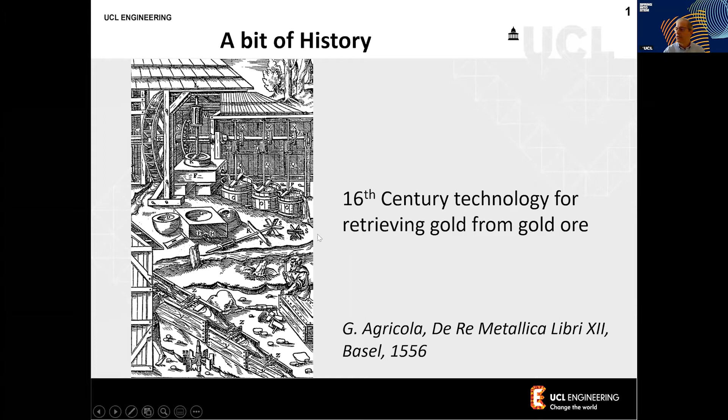And in fact, these reactors are still being sold and being used, and they're working very nicely. But we would like to see if there is a new technology, considering now that we're in the third millennium, we would like to see if there is a new technology that we can use. And this technology, the one that we'll talk about today, will be process intensification.

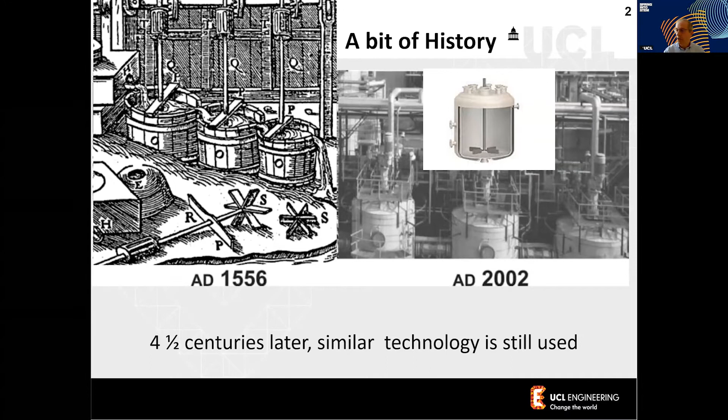So what is process intensification? Process intensification is a strategy for making very large reductions in the size of a chemical plant. So we can make things much smaller, but also we can make them much more efficient. These reductions come from shrinking the size of the individual pieces of equipment, but also by cutting down the number of operations in the chemical process, as we'll see later in some examples.

This concept of process intensification started with Professor Colin Ramshaw, who was initially at ICI. ICI does not exist right now. It was a chemical company based in the north of England initially, but it was an international company as big as BASF would be today. And he actually suggested this concept.

That was back in the 1980s. After that, people in China developed the high-G technology that he actually started talking about in the 90s and maybe a bit later. The Delft University of Technology, together with DSM, worked on structured reactors, developed further the technology, and moved into PI. And after that, it was France who got into the technology. And in fact, maybe about 5 years ago, finally the US started getting into this technology, and they have a big program which is called RAPID.

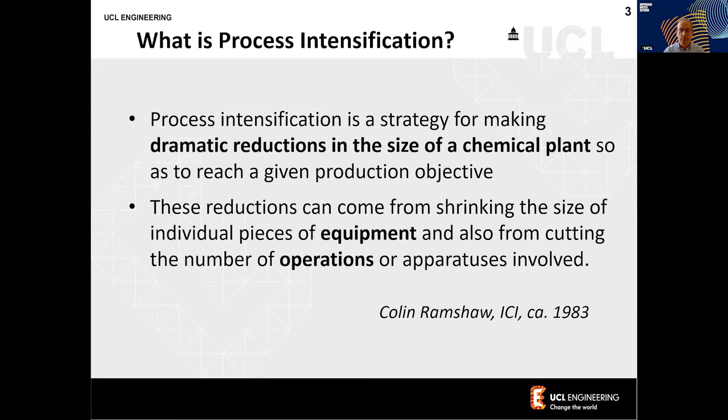Some other characteristics of process intensification: when we are talking about process intensification, we're talking about a revolution rather than an evolution. And this is because the change is substantial. We're not talking about decreasing the size by a factor of 10% or 20%. We're talking about decreasing the size by a factor of 1,000%, 10,000%.

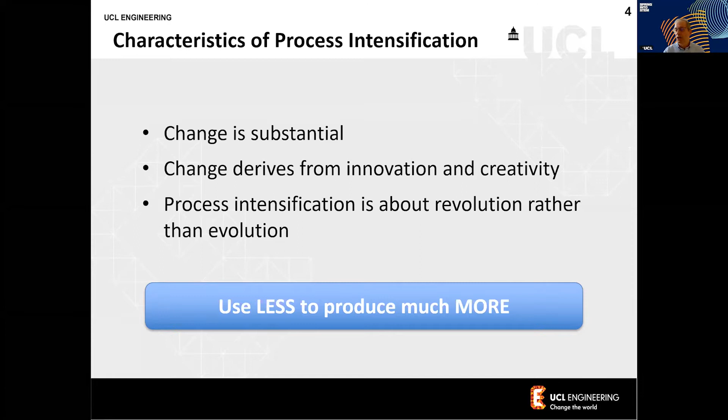Another way to think about process intensification, something that Andrei Stankiewicz, another person who was very much involved in process intensification from Delft, as I mentioned earlier, used to say, is that process intensification is basically using less to produce much, much more. I would say also these days it is important not just to make more, but also to make it more sustainably and more environmentally friendly.

So many of the present chemical plants look like that. This is kind of a virtual excursion of school children in a chemical plant, and the engineer here, you can see, is very proud and showing the school children this chemical plant, and he says this is the biggest unit of its kind, and this is where we are.

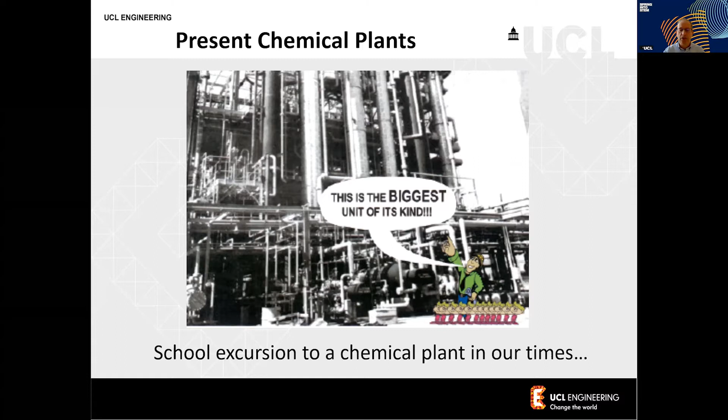You can see the big refineries, and this is how they would look like, and they still look like that currently. What we want to do is, in the 21st century, go and change this paradigm and talk about not the biggest, but the most efficient, the most sustainable unit of its kind. So you can see now the pictures of the old chemical plant on the walls, and hopefully our chemical plants in the 21st century and beyond will be much more efficient, smaller, and unobtrusive.

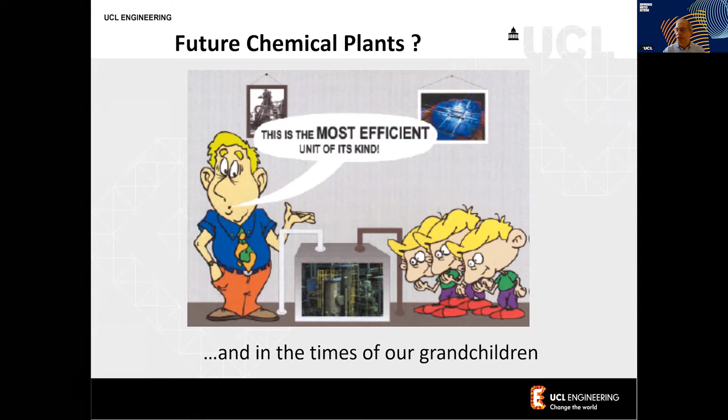So this is the new paradigm of process intensification. What are the benefits of process intensification? Here PI is for process intensification. The capital and operating costs...

The capital and the operating costs, hopefully, when we use process intensification, can reduce by a factor of 20 to 80%. So you can make processes cheaper. We use smaller chemical plants. Very importantly, we can increase the safety.

And the safety increases because we decrease the volume. So if you decrease the volume of a reactor of a chemical plant by 10 to 1,000 times, then you have less chemical available. And even if there is an accident, the impact will not be as high as would be with a standard chemical plant.

Energy savings, which are very important, can be 20 to 80%. Less waste, which means that we have better selectivity to the desired product. Selectivity is a measure of what percentage of the raw material is converted to the desired product as compared to the undesired. So we like to operate at 100% selectivity, meaning 100% of the raw material gives 100% of what we desire, and zero waste.

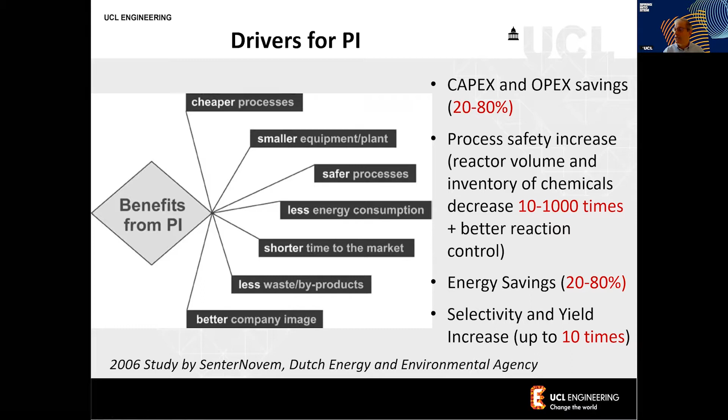And there are other aspects which are interesting to managers, which are shorter time to market because they are smaller chemical plants and so forth. These are from a study from the Dutch Energy and Environmental Agency. So these numbers are actually numbers that people have come up with based on examples of process intensified plants by that time.

What are the barriers to PI? Today, most of the plants are still not intensified, although there are more and more chemical plants, particularly the new ones, which are designed with process intensification in mind. One is the investment risk, because these are novel apparatuses and processes, and in some cases it's not proven, and that's why if people are risk averse in the industry, they would tend to actually use the old equipment. We need more research and development, and this is also what we are doing at UCL and in other chemical engineering departments, to better understand and develop these processes so that they can be taken up by industry.

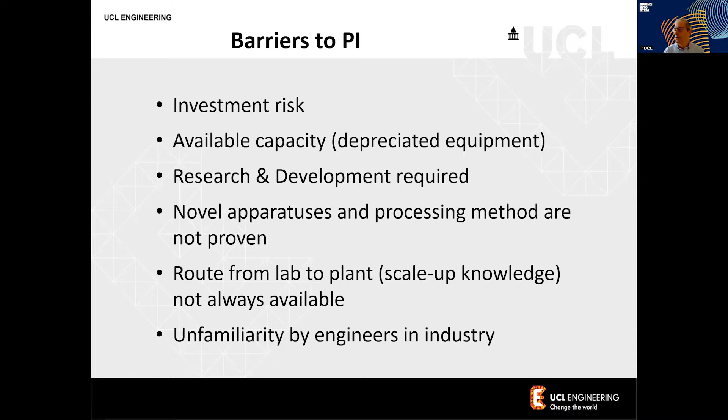The route from lab to the plant is not always available. We develop them, we study them in the universities, but before industry adopts them, we need to demonstrate them at pilot plants at a slightly larger scale, not yet at the final scale, but we need to demonstrate them to build confidence in the industry. And this is the major issue, basically the unfamiliarity by engineers in industry that we will need to make sure we overcome. And here is an example.

This is not from the chemical industry, but this is the same type of mentality you see in this cartoon, where the soldiers have a fight, a battle to fight, and as you can see, they are so engrossed in their own type of urgency to fight the battle that they are not interested in using the new technology that can potentially help them.

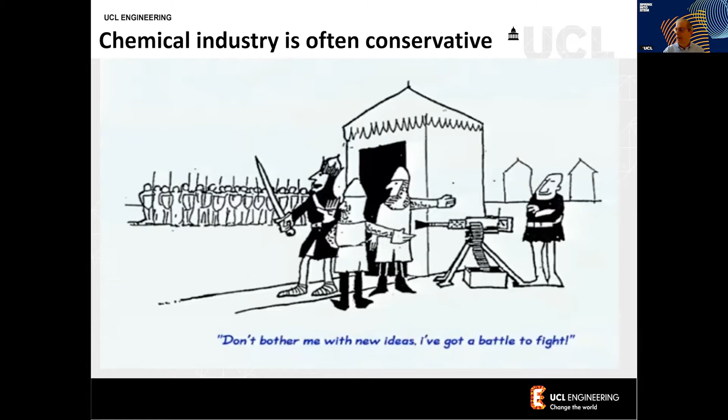And process intensification is not something actually that new. If one looks back on the first industrial revolution, and if you have an old 20-pound note, you can actually find hints of process intensification on it. This 20-pound note has Adam Smith, who was an economist, who wrote this book in 1776, The Wealth of Nations. And over here, it says the division of labor in pin manufacturing and the great increase in the quantity of work that results.

So Adam Smith, in the book, says that he visited a pin factory which employed 10 men, and these 10 men produced 48,000 pins a day. And he goes on to say that if in this factory, the labor was divided, so each worker did a different task—one of them would be the packaging of the pins—however, if there were 10 workers that did all of the steps themselves, from the initial use of the raw material, creating the pins, all the way to packaging, then he reckoned they could produce only 20 pins a day. So you can see process intensification in action here, going from 20 pins to 48,000 pins.

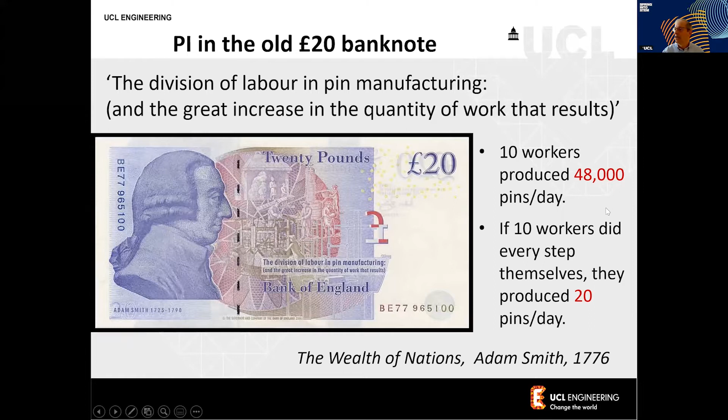So this is in fact how the Industrial Revolution started, and you can see that the concept, in that case, was by division of labor. And of course, pins maybe now are not very much used, but the concept of having a different philosophy of the way that we organize chemical plants could provide an intensified increase in productivity by many orders of magnitude.

Currently, the way we can achieve process intensification is by developing different equipment and different methods. We'll see various examples of reactors, like the spinning disk reactor, the static mixer reactor, monolithic reactor, and microreactors. But also with methods using alternative sources like centrifugal fields, ultrasound, solar energy, electric fields, and microwaves. As you know, the chemical industry is moving away from using oil as an energy vector and trying to use electricity instead. So this is another example of process intensification.

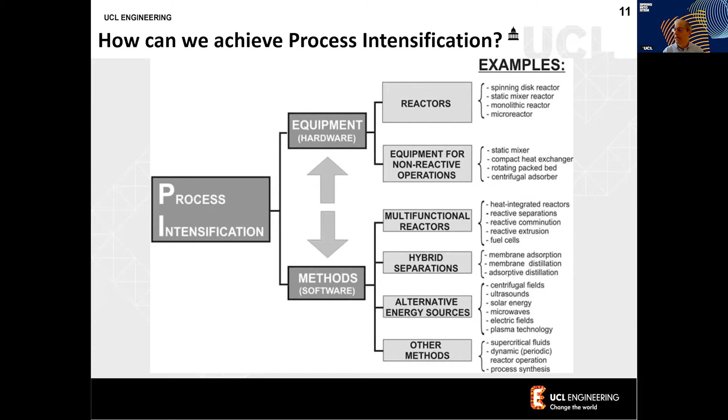So these are two equations which are very similar. They're very simple, but they give you a very good grasp of why we can intensify processes when we go to the small scale. If some of you may have come across this, essentially it's like Fick's law over here.

Here, the Fick's law: rate of mass transfer is the surface to volume ratio, the surface of a vessel, external surface, over the volume of that vessel, multiplied by a certain proportionality constant, which in this case is the diffusivity, multiplied by the driving force, which is a gradient of concentration - the difference in concentration over the difference of distance from a point inside the vessel to the point where we need to have the mass transfer.

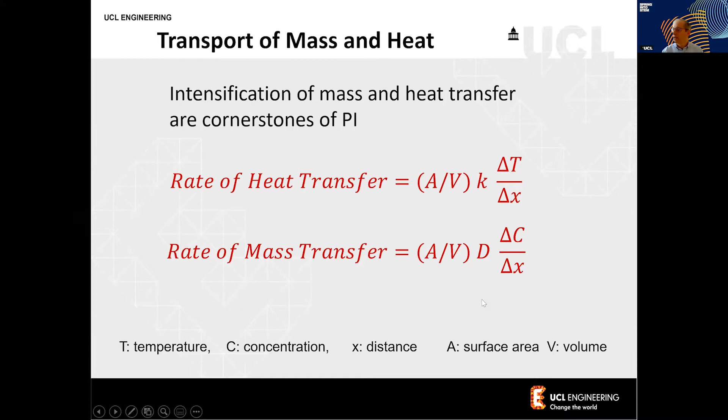And this is the same equation here. In that case, it's called the Fourier law, the heat transfer. These are the fundamental equations of chemical engineering, and it is very, very similar. You can see here, surface to volume ratio, the constant now is the thermal conductivity, and the driving force now is not a concentration gradient, but a temperature gradient. So again, x is the distance, a is surface area, and v is volume.

This is something that nature has been doing for a long time: when nature wants to increase surface to volume ratio, what nature does is decrease the size. You can see that clearly from geometry. If you take a cylinder, the external surface is pi d L, over the volume of the cylinder, pi d squared L over 4, which gives 4 over d.

So as we decrease the diameter of a cylinder from 1 meter to 0.001 meter, or 1 millimeter, the surface to volume ratio increases because the diameter is in the denominator. So the surface to volume ratio goes from 4 to 4,000 - an increase by a factor of 1,000, or 100,000%. So blood capillary vessels with a diameter of about 10 microns will have a surface to volume ratio of 400,000 square meters per cubic meter, which is a huge surface area.

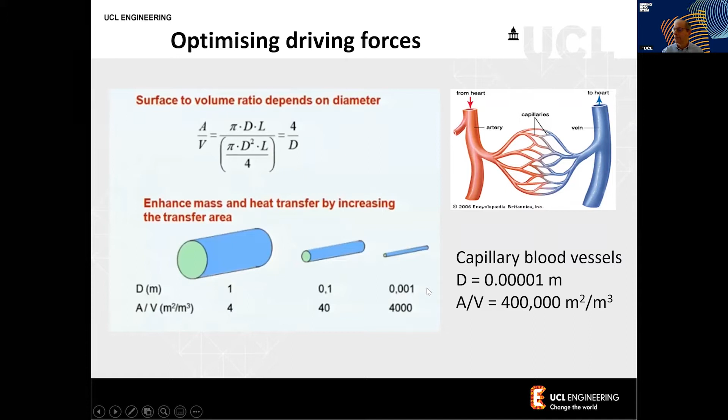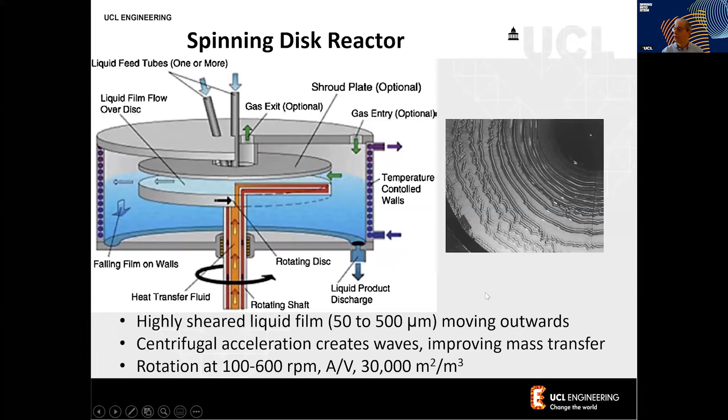An example of a reactor that has been used to intensify processes is the spinning disk reactor, where liquid is fed onto a disk which spins. Here the concept we use is centrifugal force: because we spin the disk so fast, centrifugal forces throw the liquid towards the side. At the center of the disk, the liquid is thrown to the side, becomes very thin, and also creates ripples. These ripples improve the mass transfer, but also the surface to volume ratio is very high. I'll try to play a video here to see how this thing works.

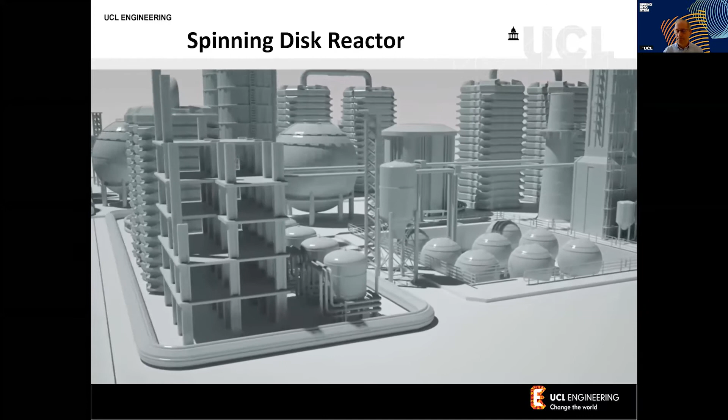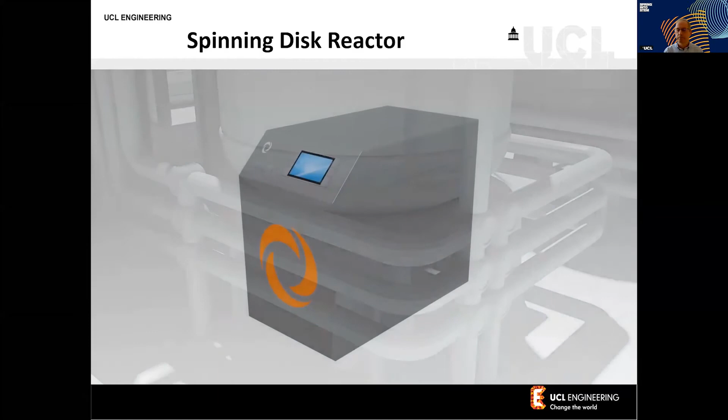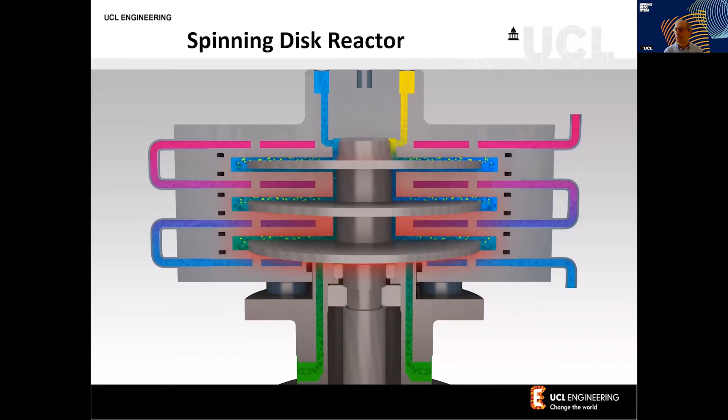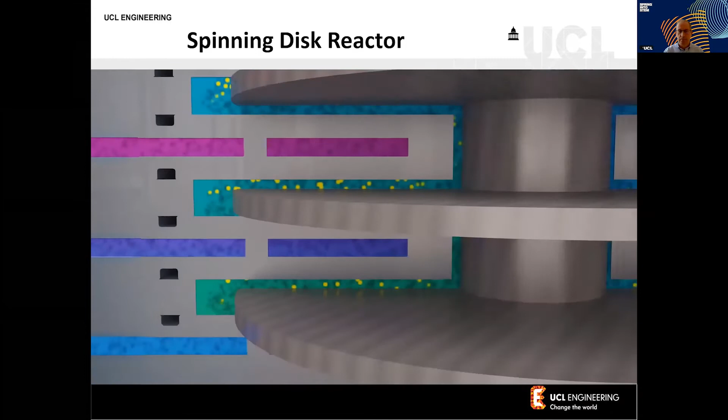The chemical reactor is at the heart of a chemical plant. Reactions are typically performed in large vessels. The spinning disk reactor outperforms conventional reactor equipment, adding unique process controllability. This reactor consists of a stationary casing connected to a motor. The motor drives 3 disks, which rotate at high velocities inside the narrow casing. 2 reactants are fed into the device from the top side and then flow around the rotating disks. The large shear forces provide very efficient mixing of the reactants. This results in high mass transfer rates, allowing reactions to take place in seconds. During the reaction, large amounts of heat are released. Cooling channels are integrated inside the casing to effectively remove this reaction heat. The combination of high mass transfer rates and temperature control allows reactions to proceed under process-intensified conditions, making the spinning disk reactor unique in terms of efficient, safe, and flexible production.

So that was a description of the spinning disk reactor from a company from Holland who sells them now, Flow ID, Spin ID. And if you noticed, the spinning disk reactor was much smaller compared to the reactors of the chemical plant. This is another example of a heat exchanger, which is much smaller than a normal heat exchanger.

You can see here an engineer in the context, to give you an idea how big this heat exchanger is that would be used in a chemical plant. This heat exchanger would be based on shell and tube heat exchange, meaning that it will have tubes inside, and the shell is the one that you can see. It will have tubes inside, which will be of the order of maybe 1 to 2 centimeters diameter.

This is the new technology from Heatric, which is a UK company based in Poole. In this case, the channels are of the order of a millimeter. So we go from about 2 centimeters to 1 millimeter. And as we just saw before, the surface to volume ratio becomes much larger, and because of that, we can decrease the overall volume that we need. It is a printed, diffusion bonded, what is called printed circuit heat exchanger, because the technology is similar to the way that we make integrated circuits. It is about 10 times smaller.

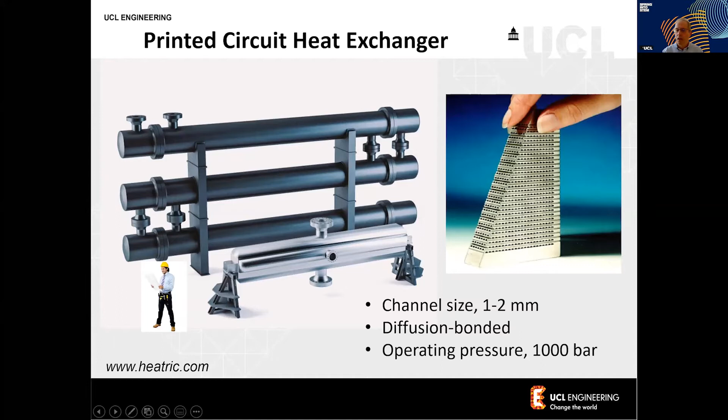Another example, which we have done work on also at UCL for the last maybe 20 years or so, are micro channel reactors. In this case, we have channels very similar to the heat exchanger you saw before, which are even smaller. You can see here 20 to 400 microns. 1 millimeter has exactly 1000 microns, and 100 microns is the thickness of a human hair. So we're talking about channels which are of the order of size of the human hair.

It is the same concept as before. We have very high heat transfer rates because the surface to volume ratio is large. Now we can intensify this because heat transfer is very important in reactions. When a reaction is taking place, we have to take the heat out. As we increase the reaction rate, we increase the amount of heat produced, so we don't increase the reaction rate beyond the point that we can release the heat, because if we do that, the reactor becomes unsafe. This is one of the limitations of current reactors, particularly for highly exothermic reactions, that you don't have enough heat exchange surface area. That's why these reactors are very efficient and very small, because you have very good heat transfer surface area, so they can run the reactor at higher reaction rates, higher temperatures, higher pressures, and still safely take the heat out of the reactor.

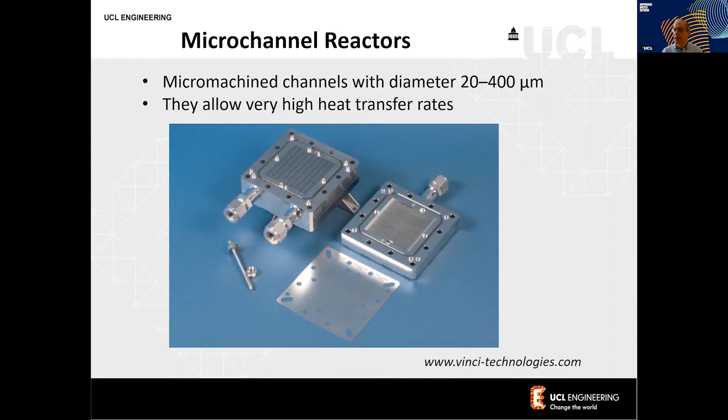Another example that we have worked on, in fact with Colin Ramshaw back in the 90s, is a catalytic plate methane reformer. Methane reforming, or steam reforming, is the standard technology so far for making hydrogen from methane. This is how a methane reformer would look like today, the conventional ones. It will be so large because it has maybe about 200 tubes, but it will need a lot of space to accommodate the flames to heat the reactor. In this case, it's an endothermic reaction, which means we need a large heat transfer area to have the heat entering the reactor to make sure the reaction takes place.

So we came up with the concept of a catalytic plate reactor, and we replaced the furnace with catalytic combustion. We have plates here: in one plate we'll have the reforming reaction, producing the hydrogen, and on the other plate, instead of having the flames, we'll have another catalyst for burning the methane, providing the heat. So we can do away with a big furnace for that. We showed that we can reduce the volume from 1,600 cubic meters to only 6 cubic meters for the same production of hydrogen.

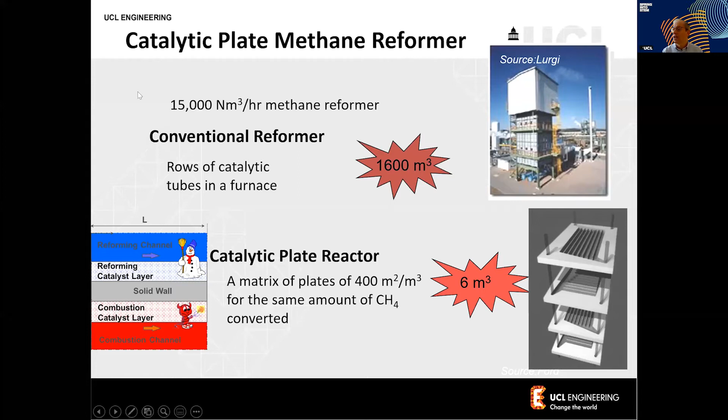An example from DSM, one of the companies which has been involved in process intensification for many years now, and they replaced this stirred tank reactor.

These are the same stir tank reactors that we've shown in the very beginning of the talk, very similar in concept to the stir tank reactors from Agricola. In this case, they are metal, and for this particular chemical they're on the order of 10 cubic meters. You can see it in the back.

So they replaced this reactor with a microchannel reactor, exactly the type we talked about, with alternating plates where the reaction takes place on one and heat exchange takes place on the other. They were able to go from 10 cubic meters to 3 liters, and this is the reactor they've used. The capacity was the same, 1,700 kilograms per hour.

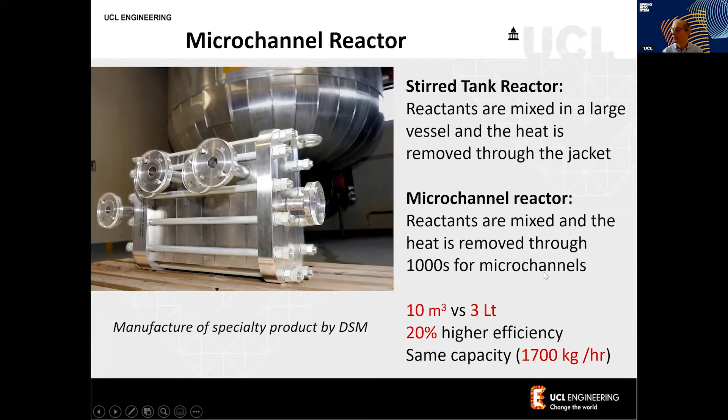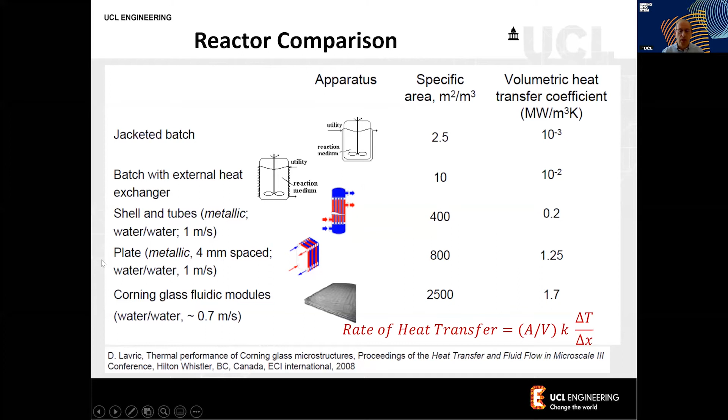This is the Corning type of reactor, and I'm sure you have at least one product containing Corning glass. You may be familiar with Corning Gorilla Glass, which is now found in about 6 billion devices—mobile phones, tablets, and so forth—because it's very strong.

So it's the same company, but apart from making glass for computers and screens, they also make reactors. This is the reactor they make at smaller scale, 3 to 15 kilograms per hour. They put more of these units together, which they call the heart-shaped reactor, up to maybe 4 times, to go to about 200 kilograms per hour. This is the way they scale up to a larger size.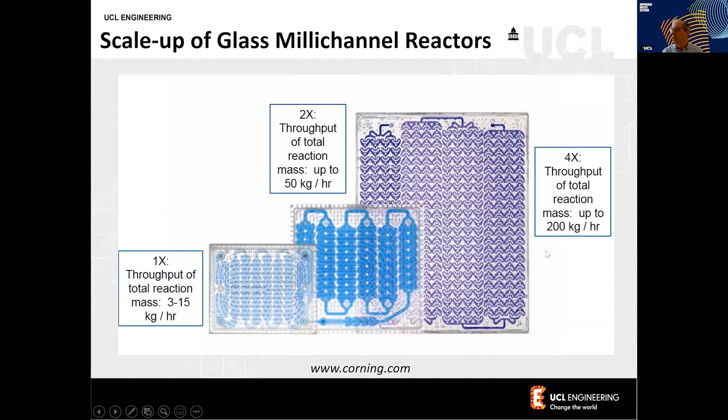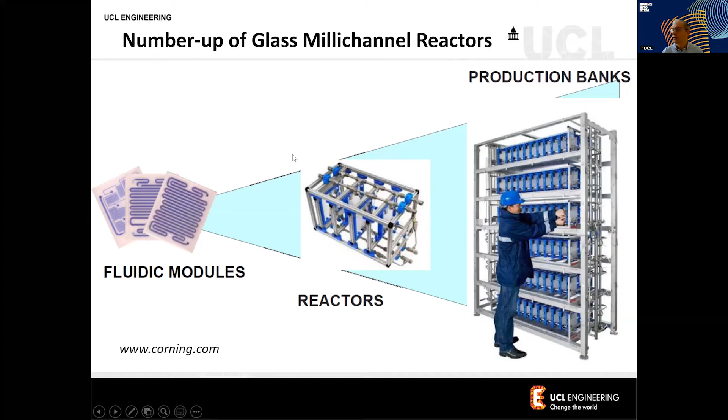But if we want to increase the volume or productivity even more, we take a different approach, which is numbering up the reactors. You can see the number up here, increasing the size—about 50 or so reactors in a rack to increase productivity. These are the types of things you learn in chemical engineering—you learn about scale up, which is the traditional chemical engineering domain. But due to process intensification, we now also consider the number up concept as another approach to increasing productivity.

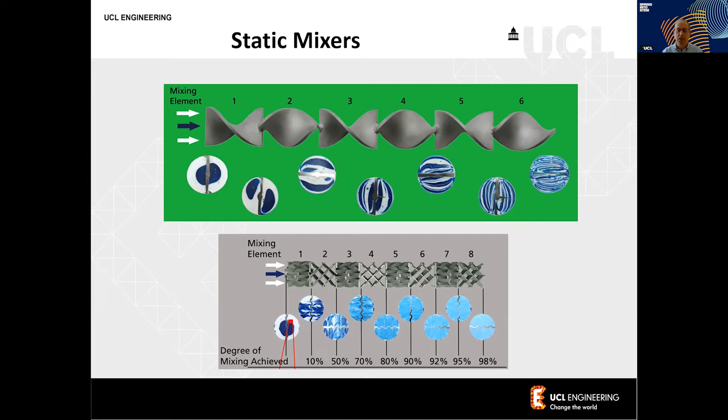This is the same concept here with this mixer, which instead of twisting, it breaks it up. You can see it's a different design, and there are various static mixer designs. Again at the entrance, you have the blue dye in the middle and the white on the outside, which are broken up very efficiently, reaching 98% mixing after a component which has a mixer with 8 of these units. So these are the static mixers, a very good example of process intensification, because now we can mix things much, much faster.

Here's another example of an intensified reactor. This is a monolith reactor. Again, there are hundreds of millions, if not billions, of these reactors in the world currently, because this is a monolithic catalyst, which is used for catalytic converters. This is what is on the bottom of all petrol or diesel cars. Actually, this is for petrol, for diesel it will be different. But all petrol cars have at least one of those, some maybe 2, under the car, and this will be a ceramic type of monolith, and this will be a metal monolith.

It's the same concept here. These channels that you see are below a millimeter, maybe 0.5 millimeters or so. It depends on the type of car, because the catalyst is coated on the walls to increase the surface area. And because we're increasing the surface area, essentially we're increasing the A from the AV that we saw before, we increase the productivity so we can increase the amount of noxious gases that we can treat, and that's why we can make it smaller. The reason we use a monolith and not a packed bed, which was the original one, is because of pressure drop, because we don't want to create a pressure drop. And even though maybe in 50 years this type of monolith will not be used if we go all to battery cars, a lot of cars in the developing world, in South America, in India, and so forth, will still be using this type of material for quite some time.

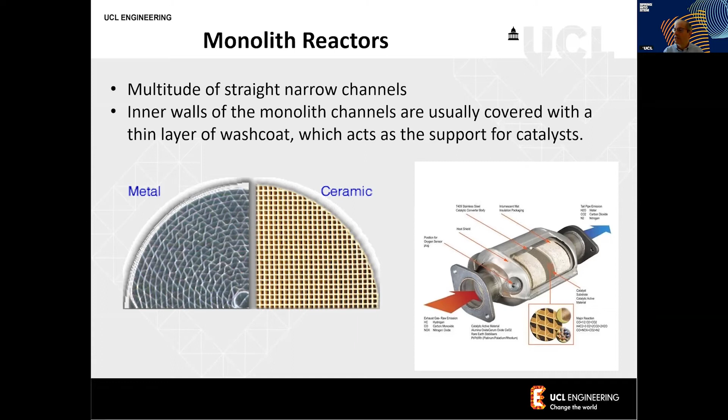By the way, this type of catalyst is being made by companies - one of the companies which makes catalysts is Johnson Matthey, which is based again in the UK. It's a very successful UK international company, which has one of the largest shares of the catalytic monolith market.

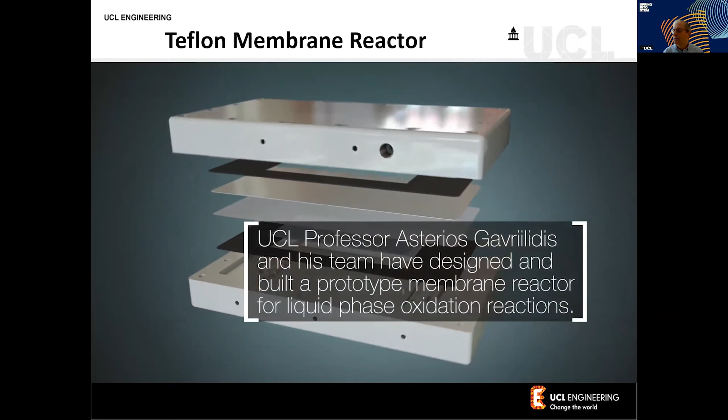This is a reactor that we developed ourselves at UCL. The CAMOX reactor is a membrane reactor to intensify liquid phase oxidation reactions. So in this case, instead of mixing oxygen with a liquid to create oxidation products, we use membranes. And here it is, we can see the membrane is this layer which separates the two streams.

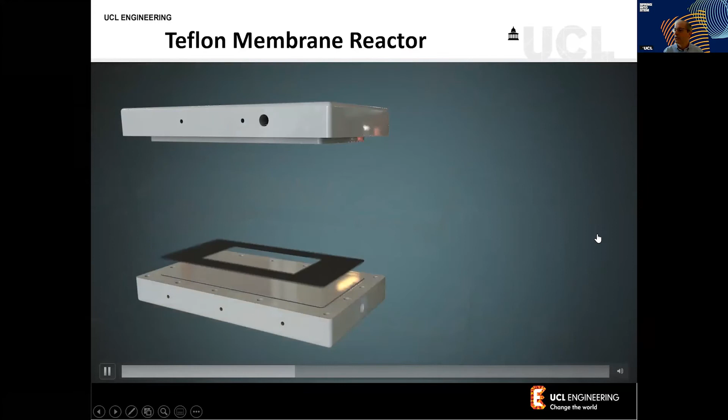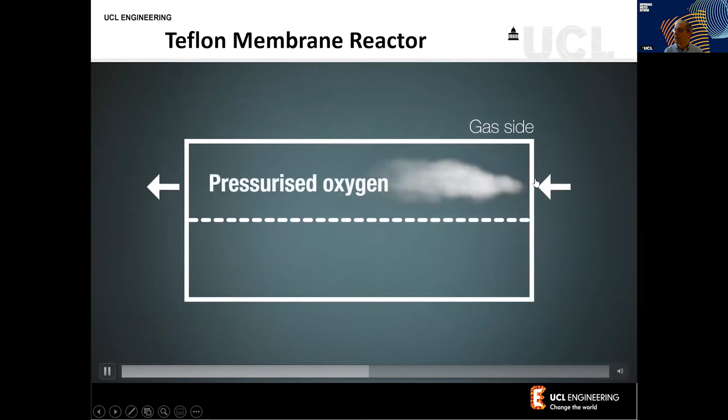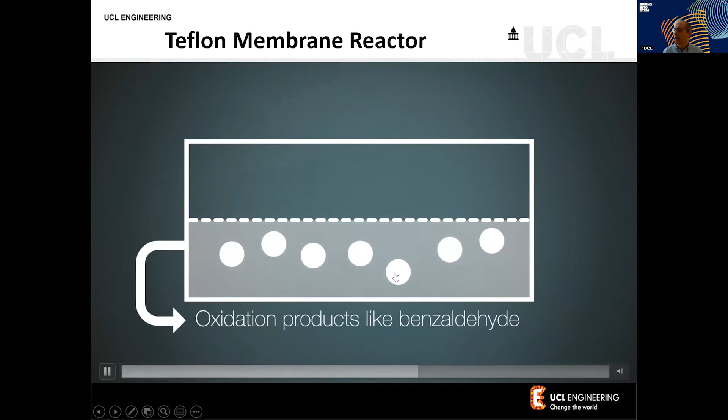So this is the membrane over here. This is the support layer, so it can operate at higher pressure. There is a catalyst on the bottom because it's a catalytic reaction. So the way it works, it has the oxygen, which is coming as a gas. The reactant is coming as a liquid, and then the oxygen dissolves through the membrane into the liquid layer and reacts on the catalyst. So what you see here, the white circles, are not gaseous bubbles, but oxygen dissolved inside the liquid.

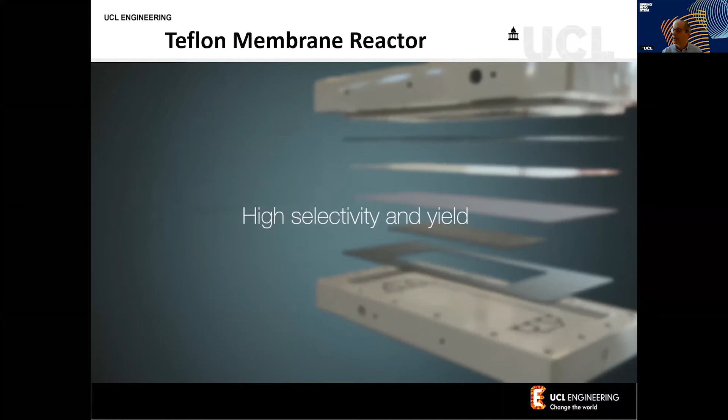And this is a safe way of doing oxidation because this cannot explode. There is a danger if you have gaseous oxygen with volatiles - if there are sparks, the reactor actually becomes something dangerous. So we came up with this concept which can intensify the reaction and also do that in a safe way.

Another type of reactor, developed initially in Cambridge and now sold by a company called NiTech in the north of UK, is the oscillating baffle reactor. Instead of having a mixer or stirrer to mix the reactor, they use oscillation and baffles inside the reactor, so the fluid goes back and forth, and because there are baffles, the fluids are mixed. Toroidal vortices are formed, and this creates the mixing.

This has the advantage that one can have a lot of little CSTRs in series, and it's a much simpler design. Because we have what is called a PFR type of arrangement, the volume of this reactor will be much, much less compared to putting together 3 or 4 of these reactors, because of the concentration profiles in the reactor and the exact details of that. If you join UCL, I'll tell you about it in the 3rd year of your studies.

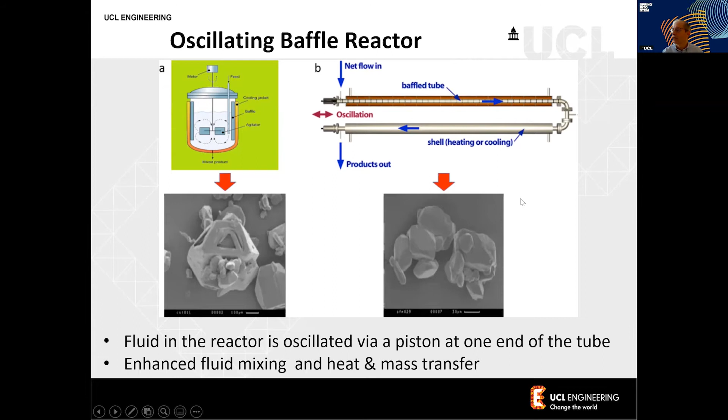These types of reactors are being used for making pharmaceuticals, and you can see here the particles. Most pharmaceuticals are made in powder form, and then people create the tablets - things like ibuprofen or other pharmaceuticals that one can use to create crystals. Here is another type of particle: in this case, calcium carbonate, used as whiteners in paints.

It's a very simple concept, the helix reactor. So instead of having a straight tube, we coil the reactor, and because of centrifugal forces, we have vortices being created - Dean vortices. These Dean vortices create better mixing and improve mass transfer, and you get this type of product with a helix reactor, whereas if one uses a straight tube, one gets this product - not very well defined, not uniform, large particle size. So clearly this is a better product than that.

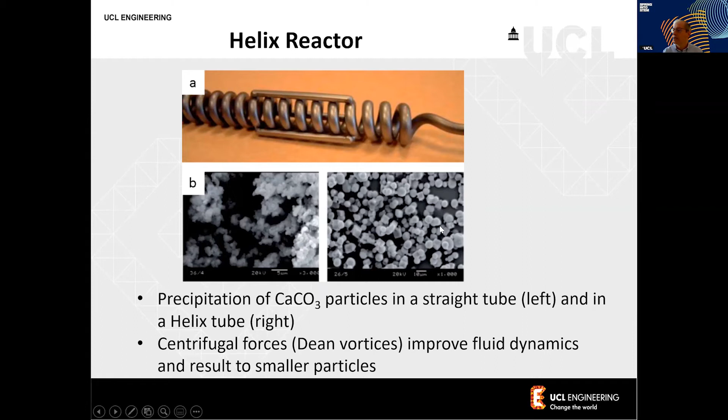Now we can also make plastic 3D printed reactors. These are some examples of the 3D printed reactors that we have, that people can make. The advantages are one can make them very quickly. You can do various designs like this one, and test very quickly different types of geometries.

And this is a different mixer design, called split and recombine, which is again a very efficient mixer. You can do it very easily using 3D printing. This is another coiled reactor, similar to the one you've seen, that people have made in 3D using 3D printing, and we can again use the centrifugal forces here to intensify it.

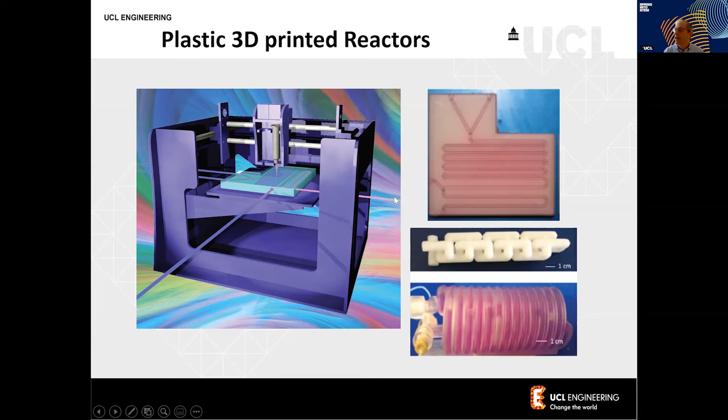These type of reactors are coming more and more into use, but they are still at the research stage. In fact, I just gave myself a research project for the 4th year MEng students who need to do one - if you join UCL, and in most departments wherever you study chemical engineering, you have to do a research project. So this year, I gave as a research project to design and make a reactor like that using a 3D printer.

This type of plastic reactor cannot necessarily take high pressures or high temperatures, so people have started using stainless steel. They use metal 3D printers, which are selective laser sintering printers, much more expensive - not printers you can buy and use at home. These are much more expensive machines. But still, the point is that one can make very complicated structures.

Here you can see the same type of coiled reactor, but this is a much more complicated structure where the heat exchange is the big coiled tube, a serpentine tube, and the reaction fluid is here. The inlet and outlet are coming here. These are like little tubes coiled around the big tube, split and recombined - tricks in order to enhance the mass transfer.

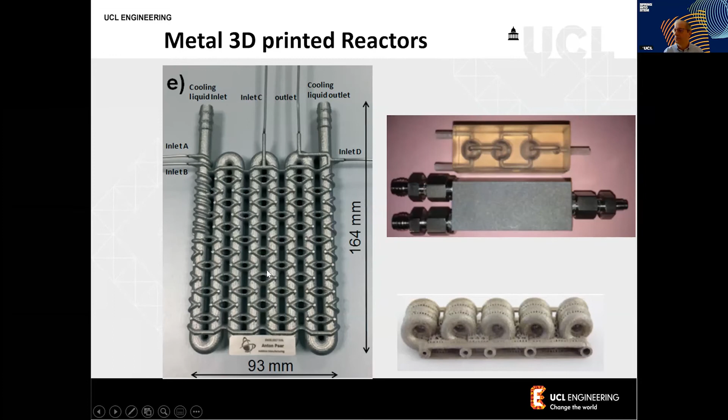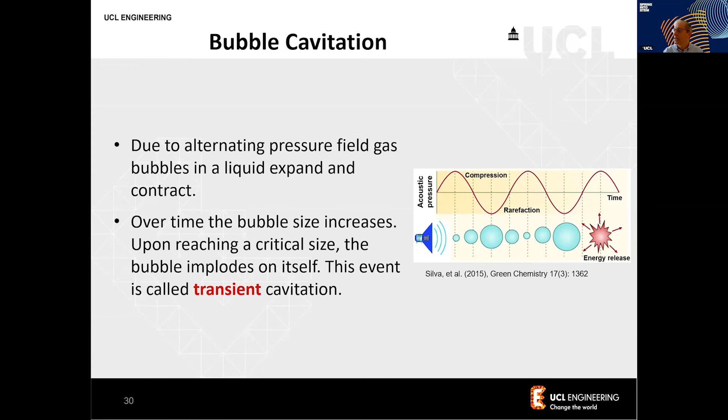Another way of intensifying is using bubble cavitation - ultrasonics. If we apply ultrasound in a fluid which has gas dissolved in it, the bubbles will increase and decrease in size because of the compression and rarefaction cycles of the ultrasound. In transient cavitation, these bubbles eventually burst, and the bursting can create very high temperatures of the order of 2000 Kelvin or Celsius locally, and also create reactive oxygen species and other radicals that can be very reactive.

In our case, we have used that at UCL for creating crystals. Here is our ultrasound probe on top of a tube, and here is a superimposed model. The blue is the model which shows the pressure that can be achieved with the ultrasound. You can see the pressure we achieve is high exactly at this spot, and this is enough to create the crystals, as I'll show you in a little while.

We made crystals of adipic acid which were this size, about 25 microns, while the commercial ones you buy are of the order of 200 microns, 190 microns - much larger. But very importantly, they have a uniform size distribution.

So this is again a much better product because smaller size and uniform size is key in all these particular materials, for all kinds of reasons: for bioavailability in the gut, for pharmaceuticals, for dissolution inside other chemical reactors and so forth.

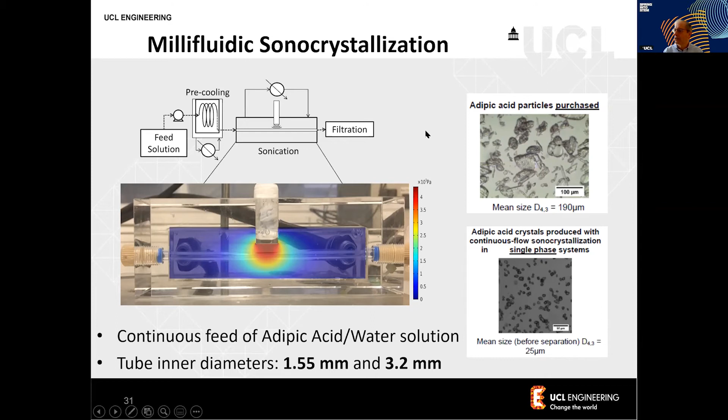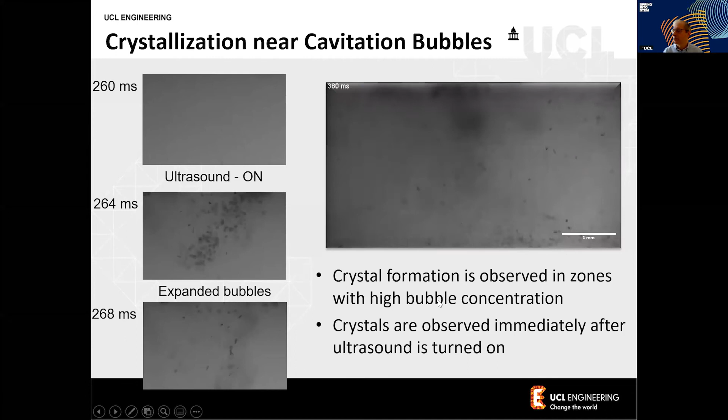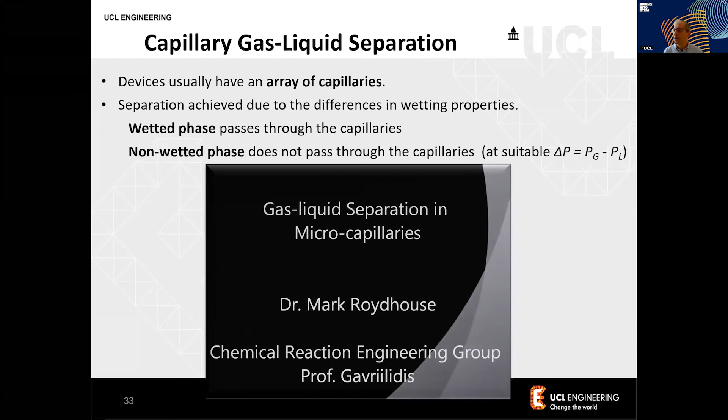Here is an example of a capillary gas-liquid separation that we worked on at UCL, using microcapillaries instead of gravity to separate. You can see the red is liquid and where it is white is the gas. The size here is about half a centimeter, so we magnify it quite a lot to see what is happening. You have a gas-liquid mixture coming in, with the liquid coming from one side and the gas coming from the other.

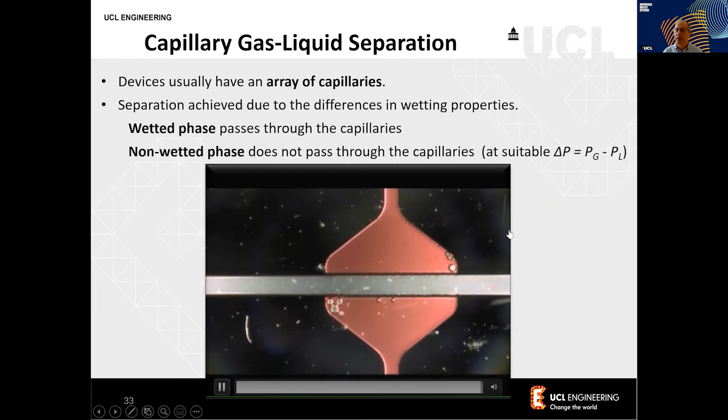This is because we take advantage of capillary forces to separate the gas and liquid. This is much faster than gravity separation if you have small bubbles, because it takes a lot of time to actually separate the bubbles from a mixture. Quite interestingly, this technology was initially developed by NASA because they wanted to separate gas and liquid in space - since there is no gravity, you can't use a gravity separator, but you can use this type of separator in space. We can discuss later why NASA would want to separate gas and liquid in space.

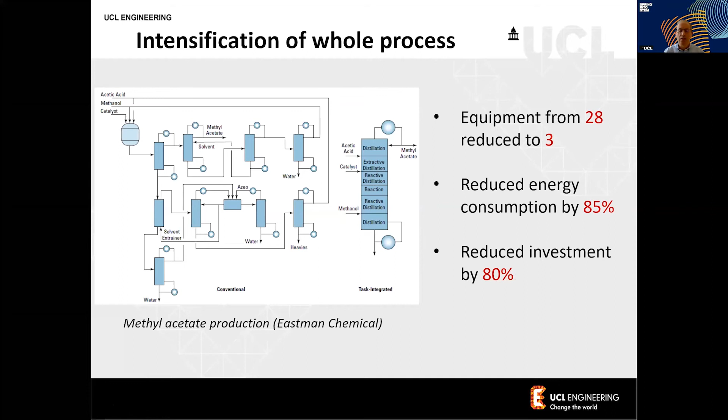This is an example of a whole process, a very successful example of process intensification, where people went from 28 unit operations to 3 by combining the distillation with a catalyst in a single reactive distillation unit, which reduced the energy consumption by 85% and reduced the total investment by 80%.

We are moving on with Industry 4.0 now to various types of intensified distributed manufacturing units. This is an example from MIT, which has precipitation and crystallization, similar to the one I showed you earlier, and formulation - meaning making the pills. So this unit can make pills of drugs like diazepam, lidocaine, and diphenhydramine hydrochloride. You can make hundreds to thousands of doses.

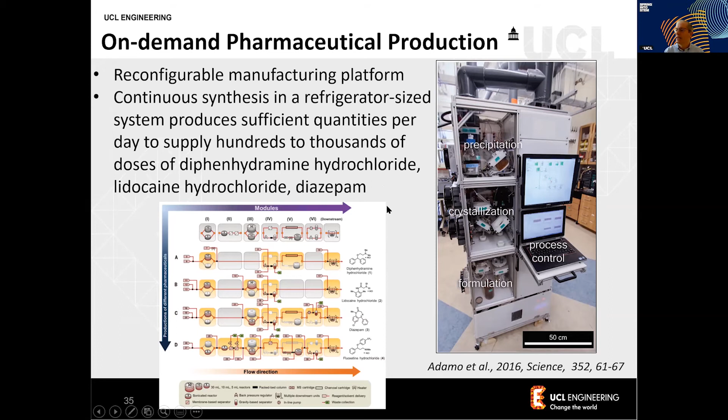So you can see this can be installed in hospitals, in Africa, as long as there is electricity, or in various places where it's difficult to reach, and can make the drug as required. This is a larger version developed by Evonik, the Eco Trainer, where you can see a chemical plant in a shipping container. Here is the control room.

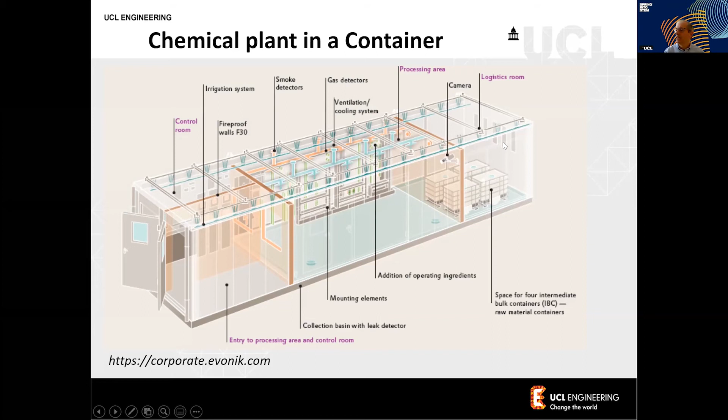Here are the unit operations, the reactor we've seen before, and here are the chemicals, the raw materials, and the products. This type of Eco Trainer has been used since the early... so this is an example from 2010 from Evonik, who developed it for the production of semiconductor quality hexachlorodisilane, used for making silicon chips. They constructed the whole container on site, put it on the customer's site, and after 3 weeks this plant was able to produce the chemical on spec as expected. So it didn't take years to develop the plant - it only took 3 weeks to get production going.

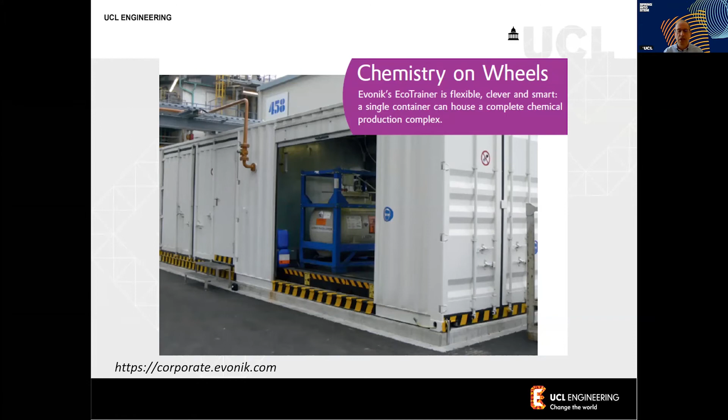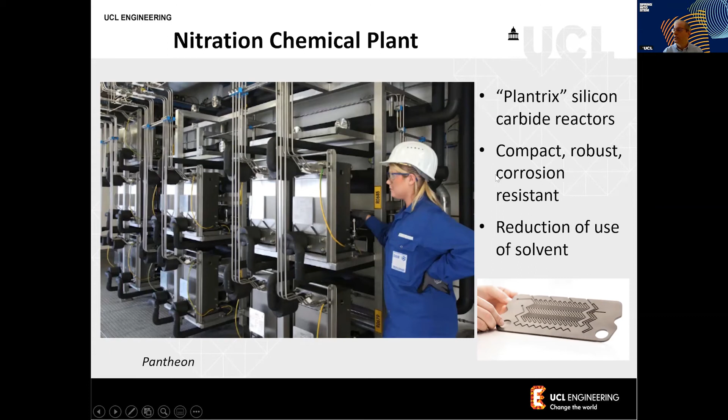This is another example of a nitration chemical plant using silicon carbide reactors, where you can see the scale-up and the number of concepts here. A company which makes this is Chemtrix, which started initially in the UK but then moved to Holland. These reactors from Chemtrix are sold to Pantheon, a chemical company, who use them for nitration reactions.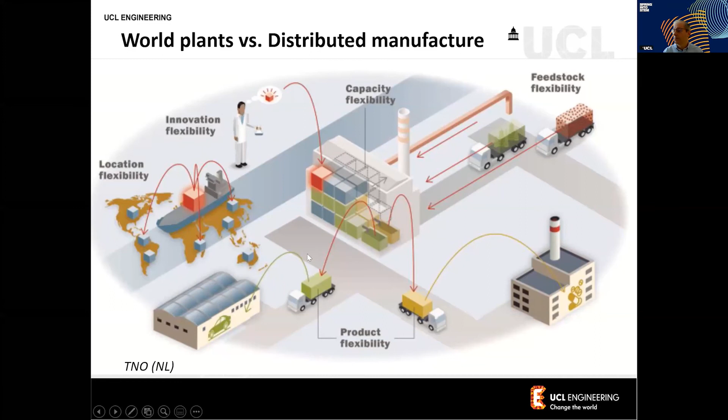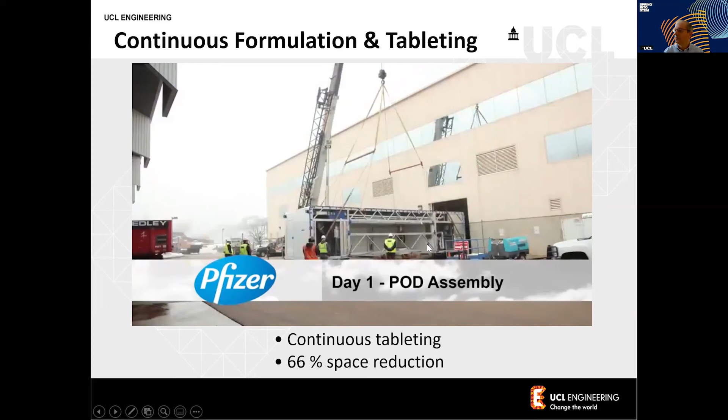This is a container that Pfizer has used a few years ago, designed for continuous tableting—I'm sure you know Pfizer with the vaccines. This container goes directly inside a chemical plant, a pharmaceutical chemical plant, which makes tablets. I'm not sure what type of application that was.

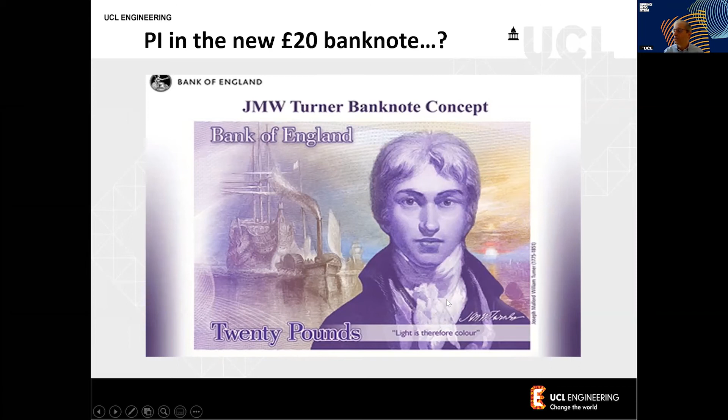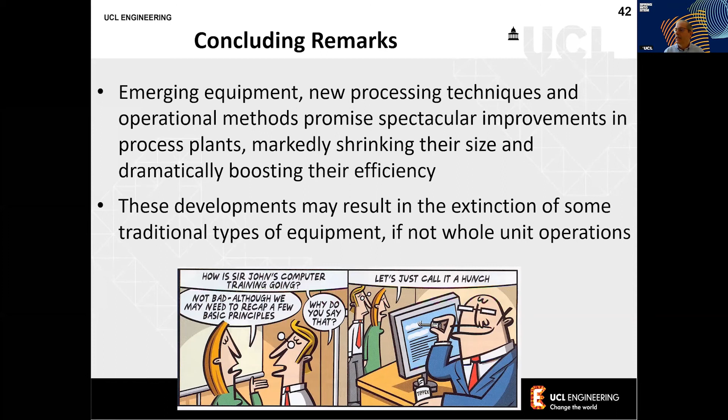So this is the end of my talk. I'm sorry it took a bit more time. I'm happy to stay a bit longer for a few questions, but I will challenge you to look at the process intensification aspects in the new £20 banknote. With that, I think I demonstrated to you that there is a new technology called process intensification that chemical engineers are very much involved in developing, to create better, intensified, and more sustainable chemical plants. So with that, I will stop sharing, and I'll be happy to answer any questions you may have.

Let's see, is there a question? There is one. It says: is there a limit to process intensification? If so, how do we know that we've reached the limit? In your opinion, how far further can we go?

There will be some practical limits, and this depends on the particular process. For example, if we talk about very small channels, the limit will be the chemical we're using—if we have fouling and they block, we cannot use very small channels; we have to use larger ones. So the size of channels depends on practical considerations. The temperature, how much we can increase it, depends on the materials we use—we have to go to more sophisticated materials like silicon carbide to increase the temperature, together with chemical compatibility. So the short answer is that there are limits, but it depends on the particular process.

Another question: decrease in volume by a factor of 1,000 or 10,000 would inevitably lead to stricter processing conditions—temperature and pressure—and the need for bolt-on instrumented safety systems. How do you deal with these process safety issues?